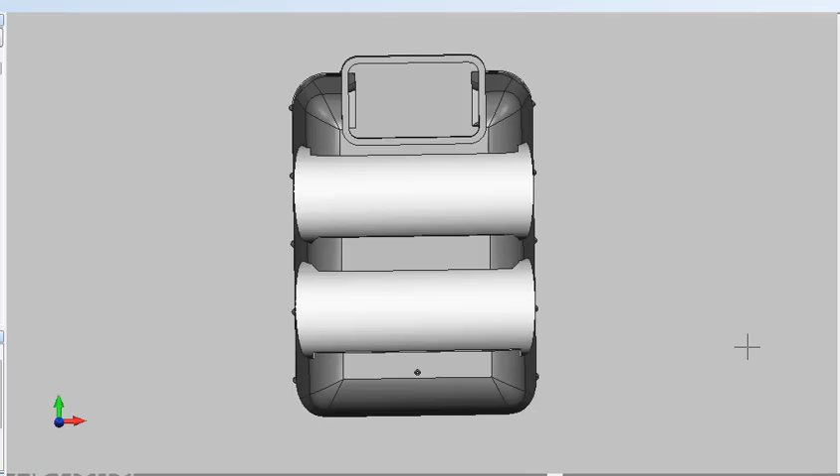Okay, so in this video I'm going to try to explain how the new shell works. First of all, I'll zoom in.

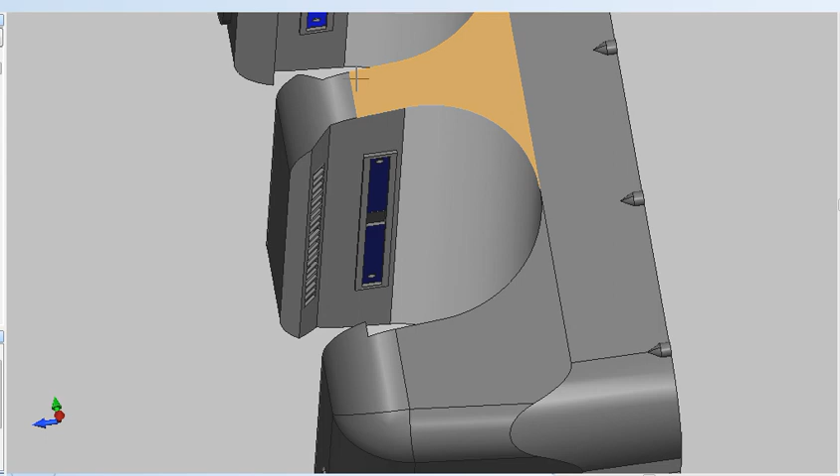These are your UVC board locations. These are the lower ones, and these are the upper ones. So you can see there are upper and lower UVC boards.

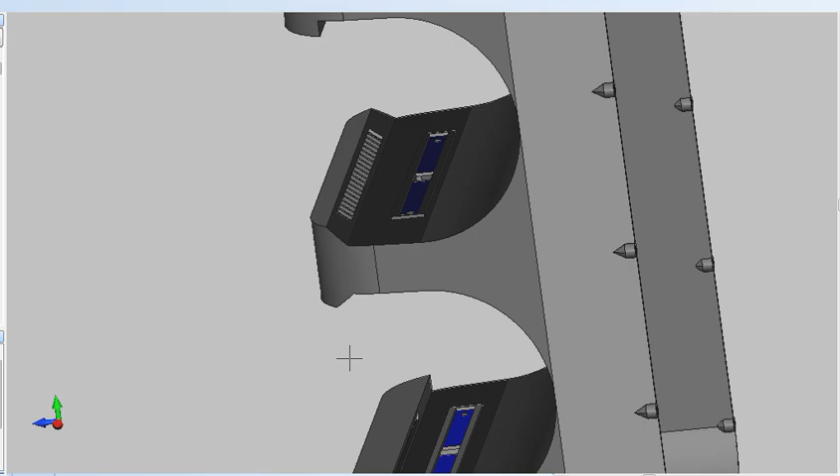I'll zoom in on the intake port. This is the intake port where air will come in, and it shares it with the upper side. So there's upper and lower intake ports, and as you can see in the back there are two portal hoses which actually draw the air out of the chamber.

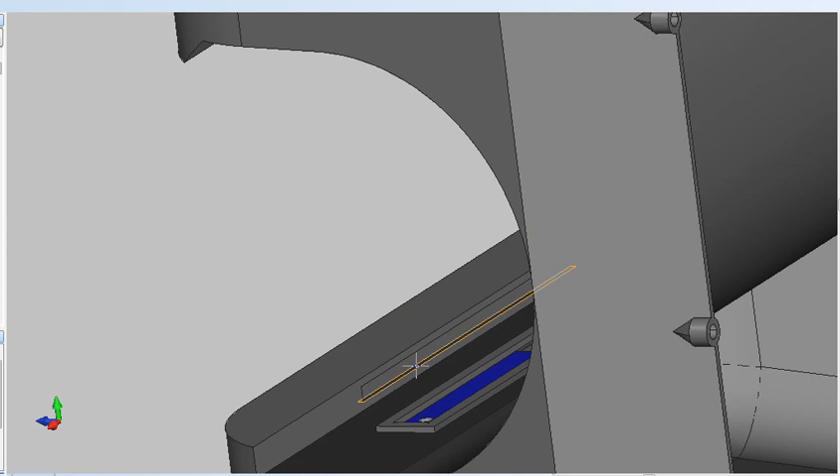And then in the lower exhaust port you can see a 5mm by 150mm slot, which will send the airflow around the curve to the intake port.

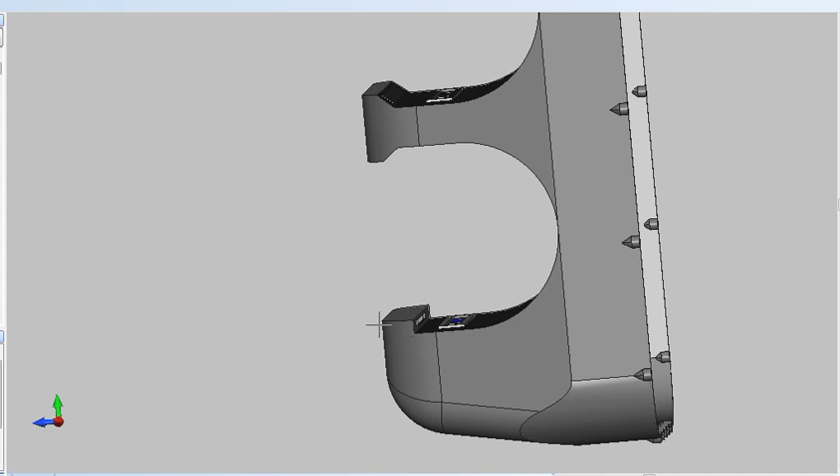Now, what happens when the hand goes inside there is called the Coanda effect. Once the hand goes inside, it will create a turbulence that'll actually surround the hand because there'll be a shield in the front here, which is like a convex curved shield on both upper and lower. So you can see that this right here is the exhaust port for the lower motor.

And this will be the upper intake port for the upper motor.

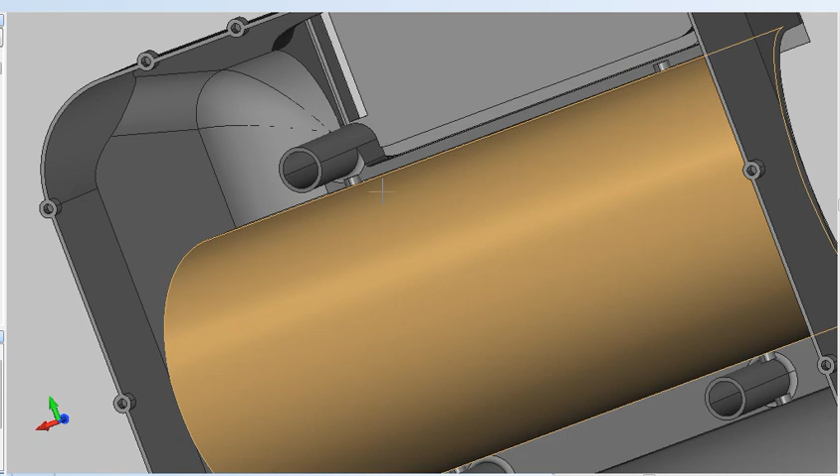These will all use brass ferrule connectors, which will actually fit in these slots here, and in the circuit boards there's brass ferrule connectors right here. So you can see there'll be a brass ferrule connector on each side.

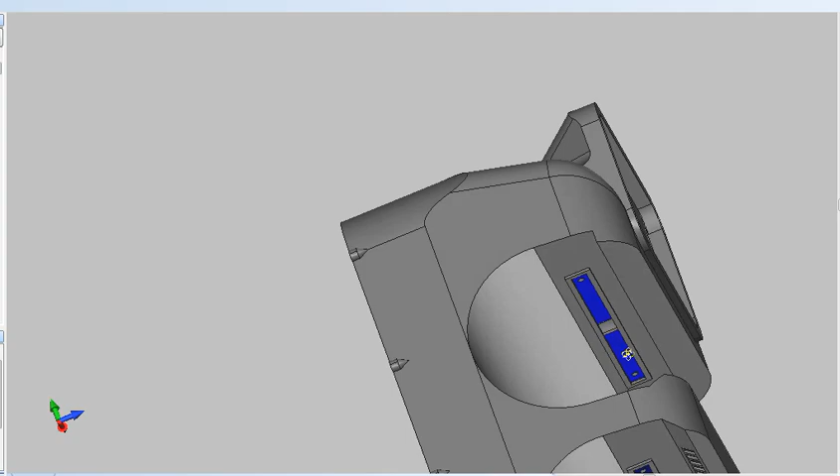There's a 20mm portal opening. This way each of the boards can all be made exactly the same, so we just replicate the same board for upper and lowers. And this is where the screen will go, the screen cavity.

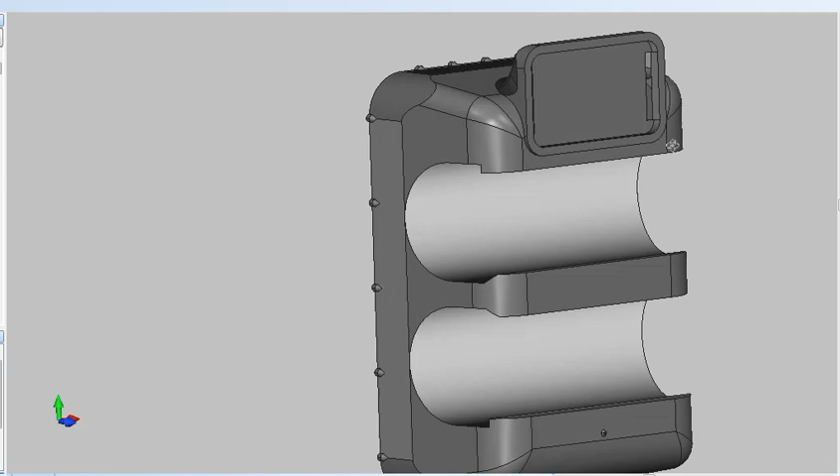And there's an opening on both sides. This allows us to take in communication port links or whatever, so that we can tie to the circuit board.

What's left to do now is to add in the motor mounts, which will be a motor mount over here, and there'll be a motor mount over in this direction here. And then there'll be a PCB mount, which will fit probably on this curve here, in the upper curve.

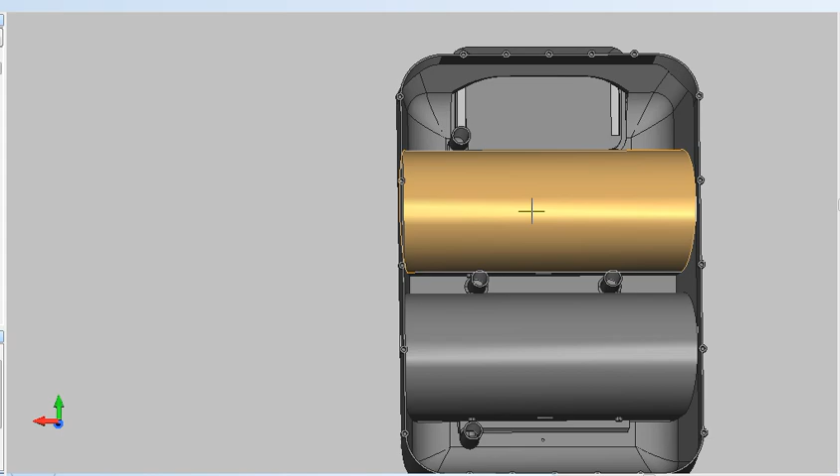And then that'll drive both upper and lower motors and UVCs, and power up the tablet as well, the control tablet.

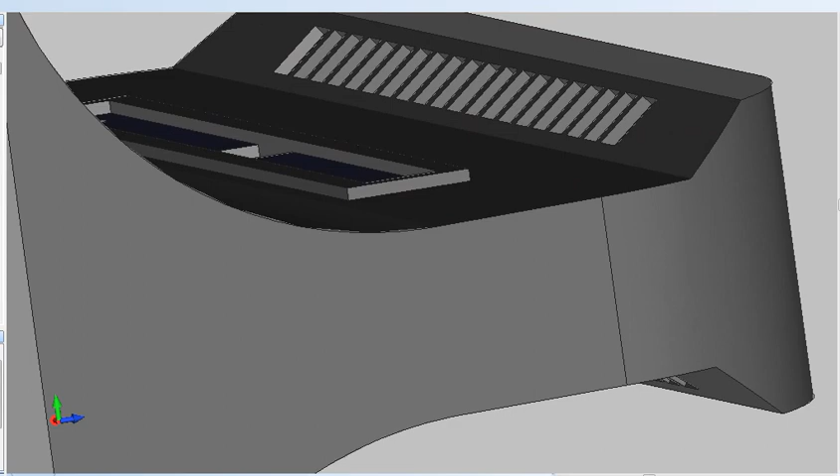Here you can see the lower exhaust port, and then you can see there's also an upper exhaust port here.

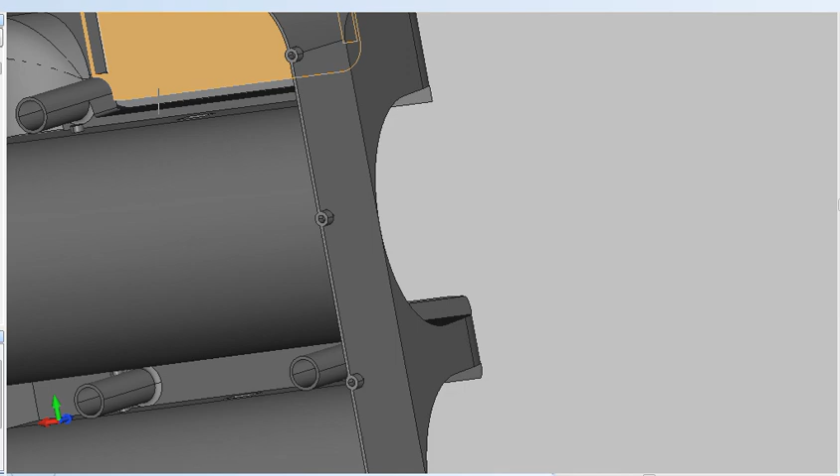So I was able to get a chamber sealed off around that, and then what I did was I just boxed in the chamber so that the airflow will just go into that box and fill it. Because it's a lot more air volume than that 5mm by 150mm space, that'll create pressure which will actually blow pretty hard out to the bottom.

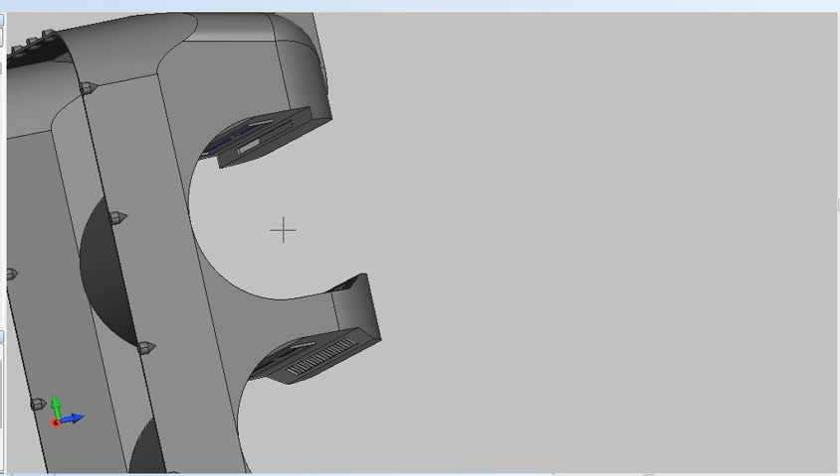Because we're going to be using a 650 liter per minute motor on both upper and lower, you'll have approximately 1,300 liters per minute volume running on both upper and lower blowers.

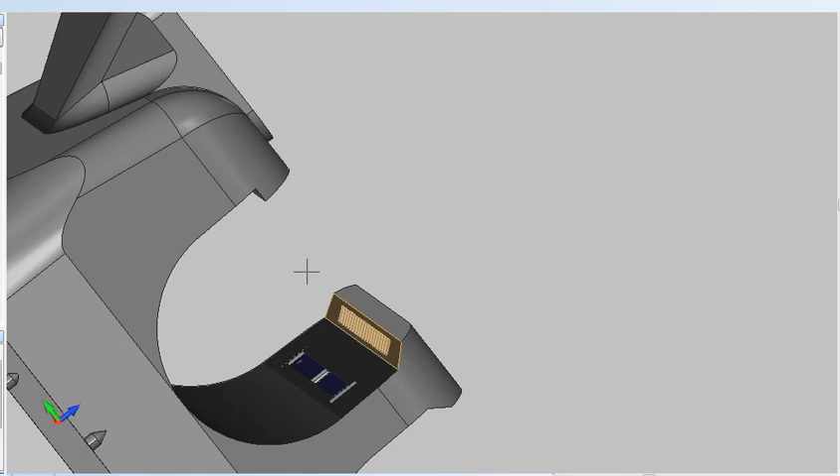Also, if you notice, these ventilation areas where the exhaust ports are will be blowing over the UVC LEDs. As you know, those things get pretty hot. So they'll actually go on the upper and lower, helping keep them cool, but also heating the air as it goes through the circulation chamber.

So this is the first video, part one, without the motor mounts and the circuit board mounts. Those will be done next.